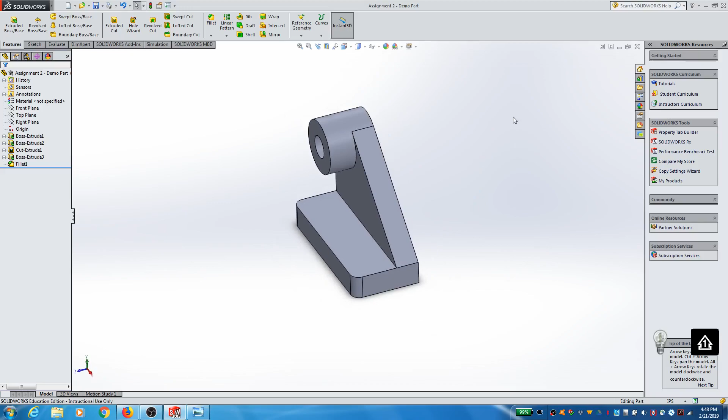This is the object. Let's go ahead. This is what we're going to wind up making, okay? It's going to look something like this in SolidWorks. So this is what the end product will be in a couple minutes here as we work through it.

Our first thing that we have to think of is the order of operations that we're going to take to construct this part in SolidWorks. And this is something that comes with practice. So if the first time that you try to tackle problems like this that are not really simple shapes, if the first time you do it, you stumble a couple times and you have a couple false starts, don't be discouraged. You will get better at doing this. You'll be better at thinking about how these shapes work and what the order of operations would be.

So the way that I'm planning on tackling this is I am first going to make this angled piece here. I'm first going to make this triangular piece, and I'm going to incorporate this curve for this circle up here, so the top edge is going to be curved. Then I'm going to extrude this back, so I'm going to sketch that triangle with the curved left corner, and extrude it back to form this part of the bracket.

I'm then going to add on, I'm going to sketch on the front face of this, I'm going to sketch a circle, and extrude that forward to give me this kind of embossed feature here. I'm then going to sketch a hole, a circle on the front of this, and cut it through. So that's already 3 sketches and 3 operations: first extrude, extrude, cut, extrude, going back. And then I'm going to work on the bottom piece after that.

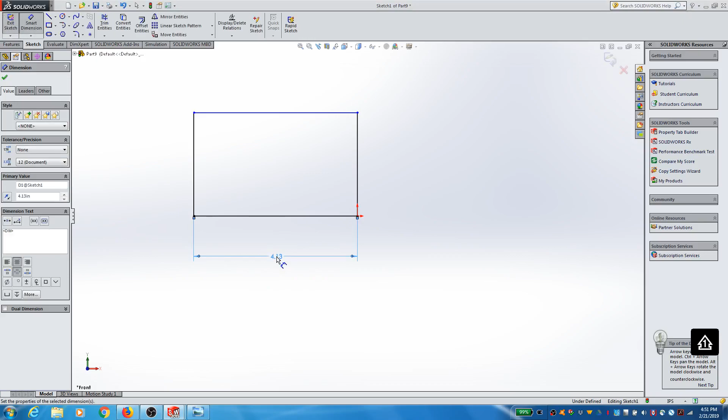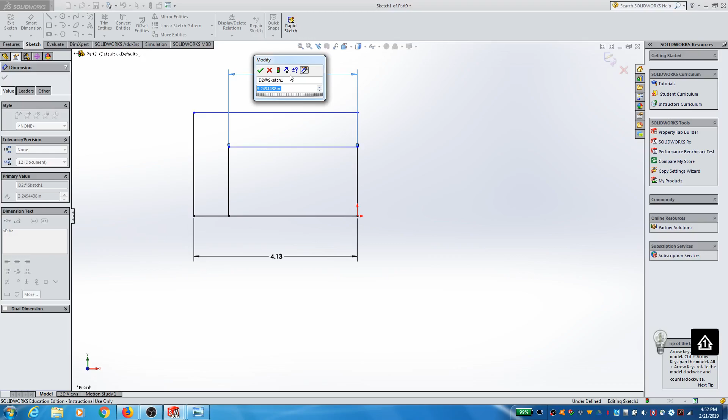Okay, so the first thing I need to do here is to ensure that the base is the proper width here, so that's going to be 4.13. And the height, I actually don't completely know yet. So what I'm going to do is another rectangle that's going to help me find the center of that circle. So this center is going to be at, let's say, 3.38, and it's going to be at 2 inches over here.

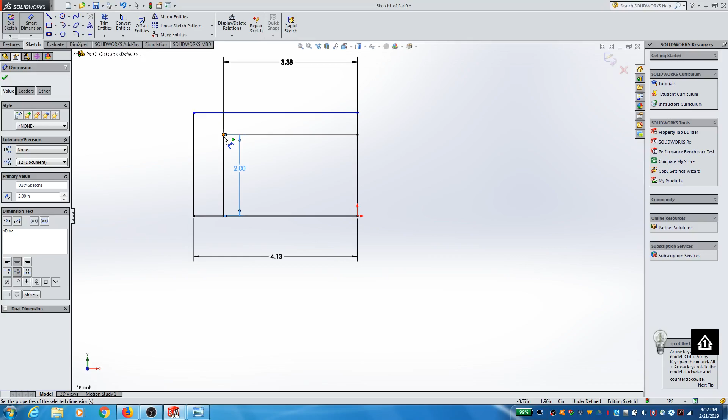So I'm doing a lot of sketching here, guys, and that's totally fine. All right, so now that I have this point, basically what I need is this base and this point. Those are the two essential features right now. So this base and this point, I'm going to go ahead and make this guy a little bit taller. I'll make that, let's say, 3.5 inches, just for fun.

Okay, so now what I want to do is sketch that circle and see where that gets me. So I'm going to do a circle, that circle is of radius 0.75, which conveniently takes me right over to the edge. That's going to be a tangent over here. Okay, now that I have that circle, I'm going to start deleting some of these lines that I don't need anymore. So what I really wanted to do was find that center, delete that for a second, and then redraw that line.

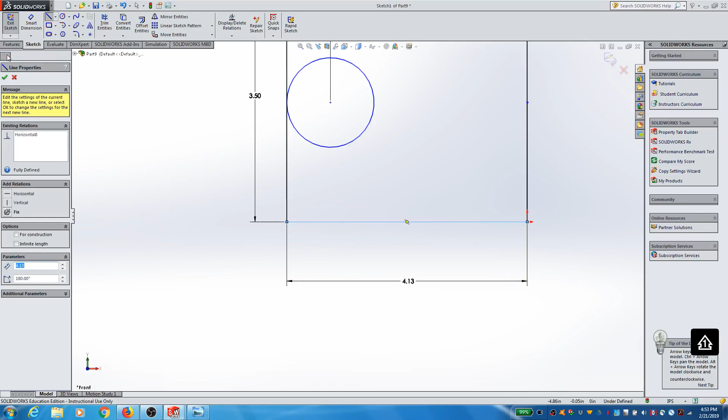Come on, that didn't go all the way. Sometimes you have to zoom in to make sure that you're totally connecting.

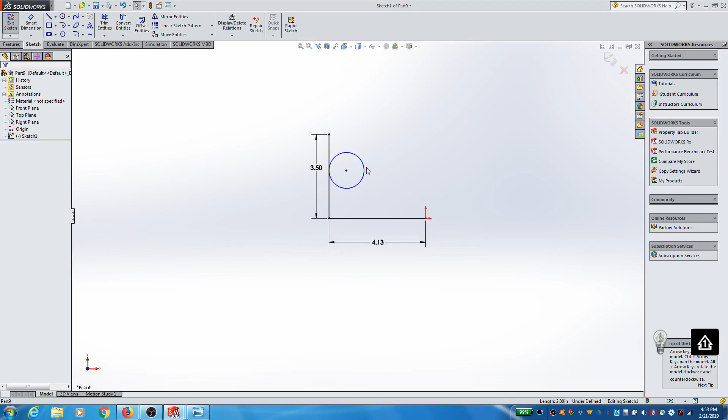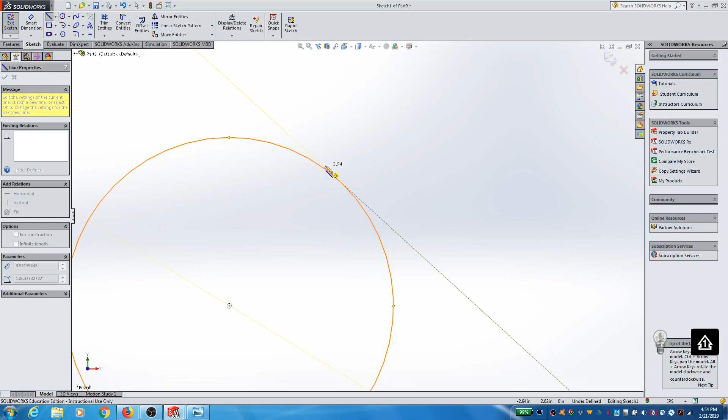What I'm going to do here is my vertical line here is going to be tangent, right, so it's going to be tangent right here. Let me flip back to this drawing for a sec. So you see how this is tangent to the circle? This is what I'm trying to recreate, right? That feature there. So I'm going to go here, and then I'm going to wait for a very special cue from SolidWorks. See that symbol there, that circle? Let me zoom in even more. That circle with a line, right? That's the tangent symbol, so that means I've drawn a line that is tangent to this circle.

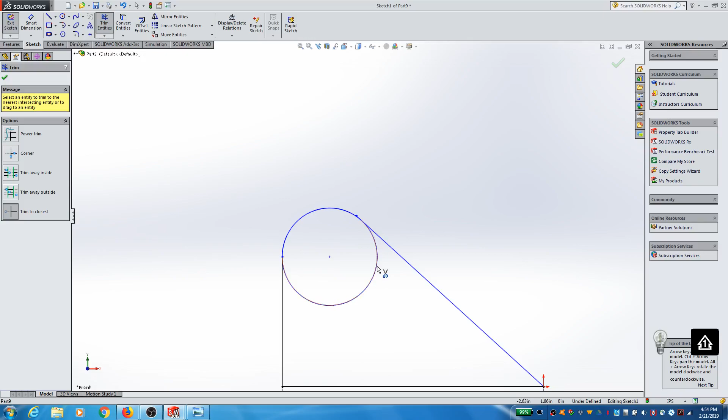Okay, now I'm ready to use my trim feature. I'm going to cut this down. Sometimes SolidWorks will scream at you, and you've got this hanging piece up here, so don't forget about that. If you leave those pieces in and try to extrude, SolidWorks will get very angry at you. Okay, so I've got my basic shape that's ready to be extruded. Now I'm going to exit. Okay, my extrusion depth is going to be 0.63.

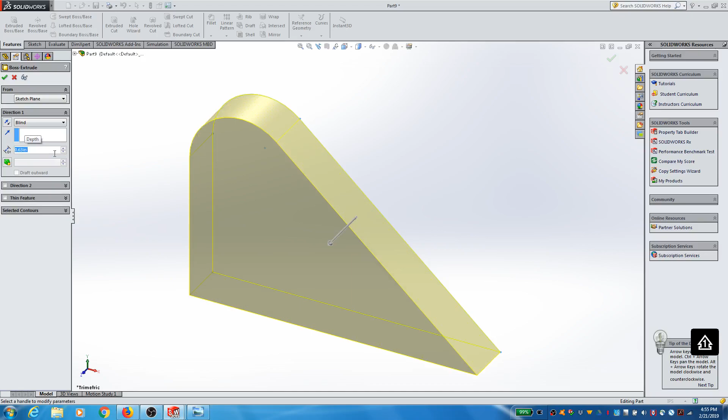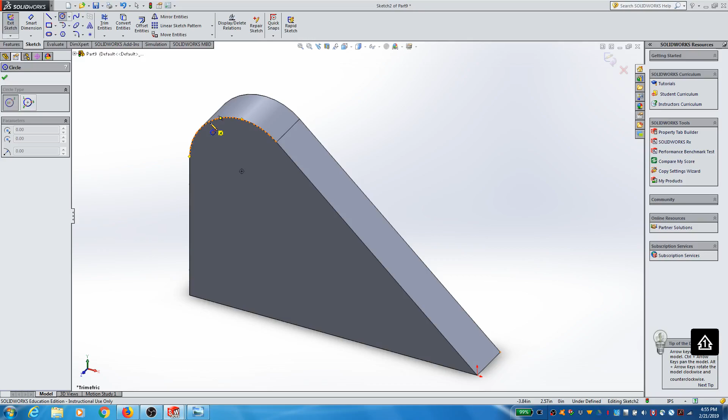Now I'm going to sketch again. I'm going to sketch that circle that I want to put on the front of this. I'll take advantage of the fact that when I'm sketching on this front surface, this is where my sketch plane is right now, and I want to co-locate that circle with the center of this arc. So notice that when I come up to that arc, the center feature comes up, right? That center of that arc will come right up and allow me to draw a perfect circle there.

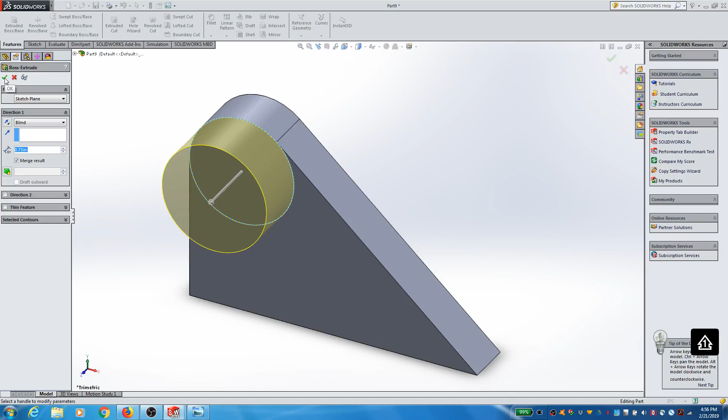I'm going to exit the sketch, and now I'm going to extrude again. The extrusion depth here is going to be 1.38 minus 0.63. So here's an interesting feature: I can use these text boxes in SolidWorks as little calculators to get precise numbers. Conveniently that's 0.75, but I wanted to show you that it can do basic math—multiplication, division, addition, subtraction.

All right, so that's gotten added. You notice there's a line here, guys. This isn't quite a feature, and not quite a glitch either of SolidWorks, but this line is still tangent, and technically this shouldn't be showing up. When we get to creating drawings, I'll show you a way to eliminate what we call tangent edges, but that's a tangent edge, and you've got one on that side too—those are not real boundary edges. This is a smooth surface.

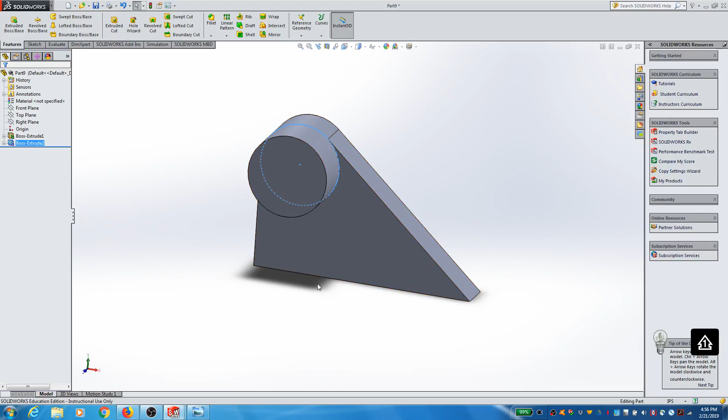Okay, so I've got that. Now I need that hole, right? So I'm going to go ahead and sketch again on this front face—sketch a circle this time. Notice I used my circle feature. And that circle is 0.63 in diameter. There we go. I'm going to exit the sketch.

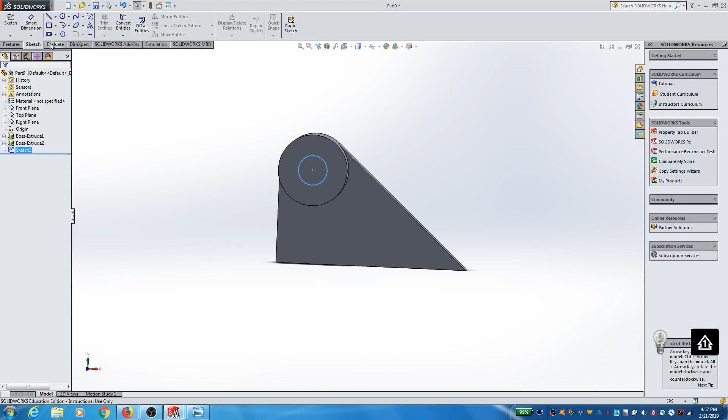And this time I want to cut, right? So back to my Features tab, I'm going to Extrude Cut, and tell it to cut all the way through all. I could have prescribed the depth of 0.75, since that would be a blind hole—I could set that exact dimension, or just say cut through it all, and it'll go all the way through. Okay, so there you see, it goes all the way through.

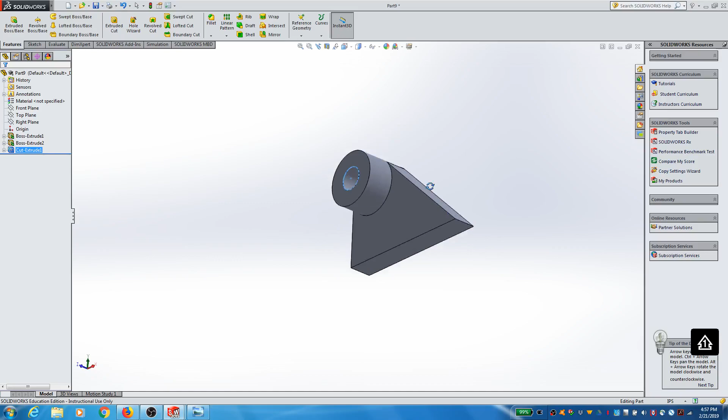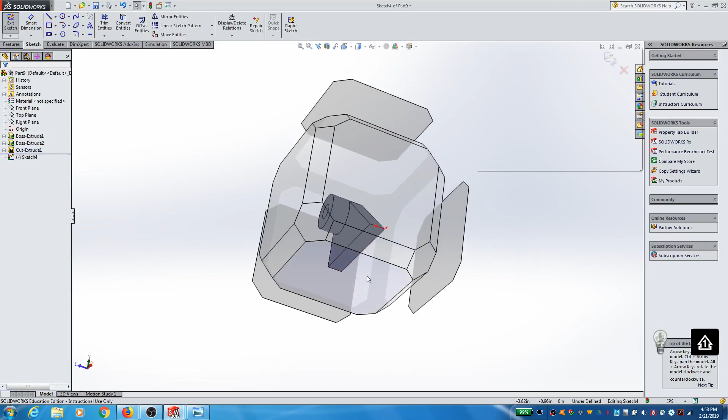Okay, last thing I have to do on this part, gang, is to add that base. So again, flipping back to my drawing, I need to have this on there—this is all covered. How am I going to do that? Well, I'm going to sketch a rectangle off of this bottom surface. So my sketch plane is going to be this one. And then I'm going to reorient myself just for convenience's sake here, like so.

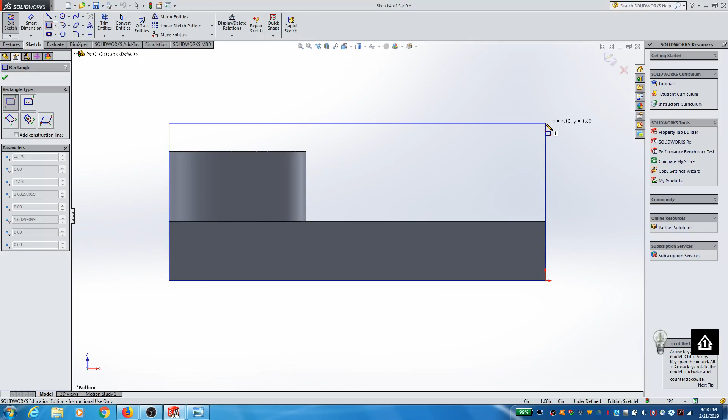Actually, I might spin myself. Whoops. Spin, try that again. Okay, rectangle—come off of that corner, and come out. Now I'm going to set my dimensions.

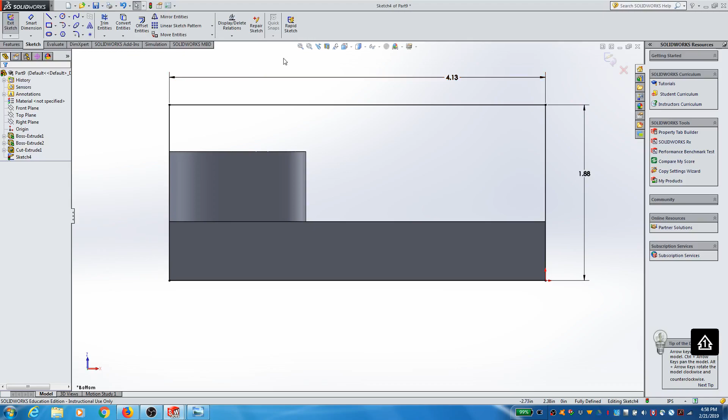First off, that width is 4.13, which was already correct. And this one is going to be 1.25 plus 0.63. There's my sketch plane, and I want to extrude down to create that feature. The depth of that extrusion is going to be 0.63.

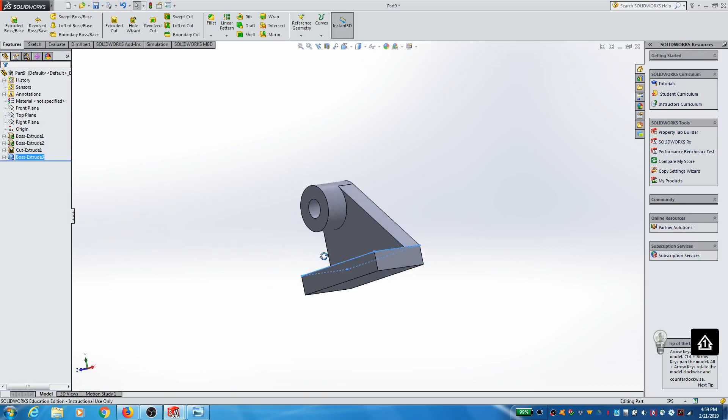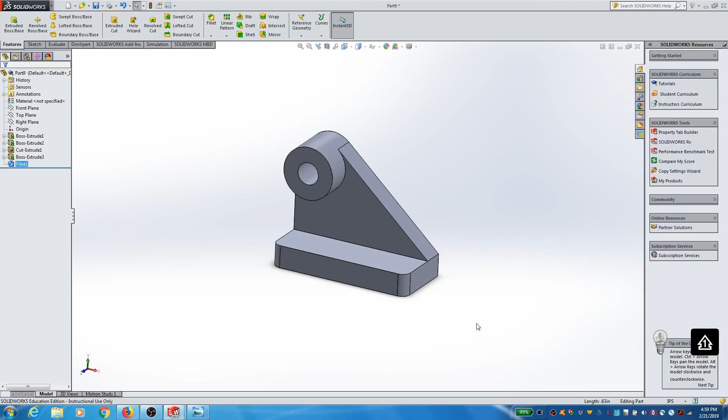Right, and the last little thing I have to do is add the rounding of those edges, which are called fillets. I'm going to fillet—the radius of the fillet is 0.25. I'm going to select which edges I want to fillet: that one, and that one. And there we go. You'll notice, guys, that you see these same tangent edges here on the fillets—those technically wouldn't show up either. All right, there's our part.